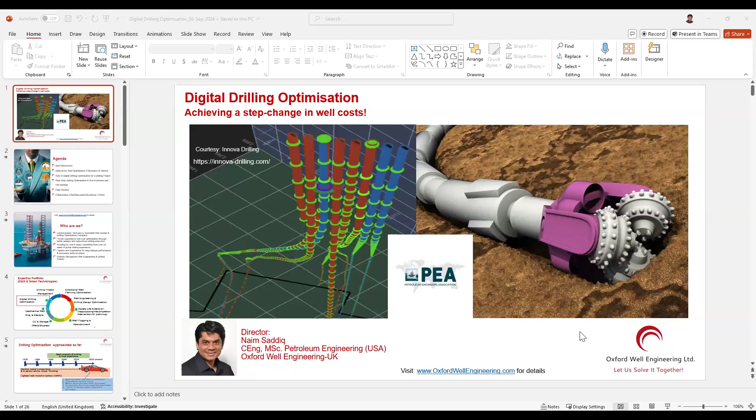So regarding this topic, this is the digital drilling optimization topic. This is one that has been around for about 20 years, actually. But it has taken things into a higher gear because of artificial intelligence and machine learning, but the rules are still the same.

For digital drilling optimization, the main benefit is achieving a step change because the cost of wells is high. When you start drilling, a lot of things can happen because you're starting your journey with the well and you have a certain feel about the cost. Those costs are usually running high, and because of COVID-19, costs have gone up 20 or 30% or even more. Because of the supply chain problem, people have increased their costs, services have gone up. Everything is shooting through the roof at the moment for drilling cost.

On your side, this digital drilling optimization is not very expensive, actually. It's the way that you do things with the data, and data is coming out from everywhere. If you're drilling a well, you have the data. So the only thing that stops you from optimizing your wells to the maximum is learning how to do it, because people can go around and try this and try that. It may work half the time. You need to be very systematic.

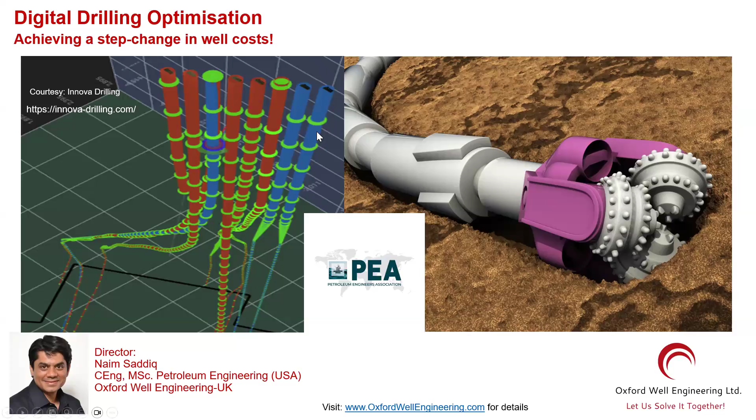But anyway, for that particular webinar, we would like to introduce it with the agenda. So after the brief introduction, which I just finished, introducing myself, I will also introduce something about my company, just maybe a single slide.

So we will talk about how this optimization stuff is going, what's the philosophy and the trends. Philosophy is paramountly important for anyone who is looking to solve a problem. They have to have this philosophy to work with. If you don't have any philosophy, you would not be working and pushing through the difficulties, because if you have certain trends that you're trying to follow and certain workflows, then you will be pushing through obstacles because you know this works. Once you have a feel that your direction is correct, then nobody can stop you.

Nothing can stop you. Yeah, we'll talk about the role of digital drilling optimization, how people use them for a drilling project from well planning, even from pre-well planning. It's a kind of journey that you have to take. If you want a full-on, full circle optimization, you have to respect data all the way, and also how it can be leveraged to apply with engineering packages and things like that. So it's got this power that you can actually use for all the stages of the drilling project.

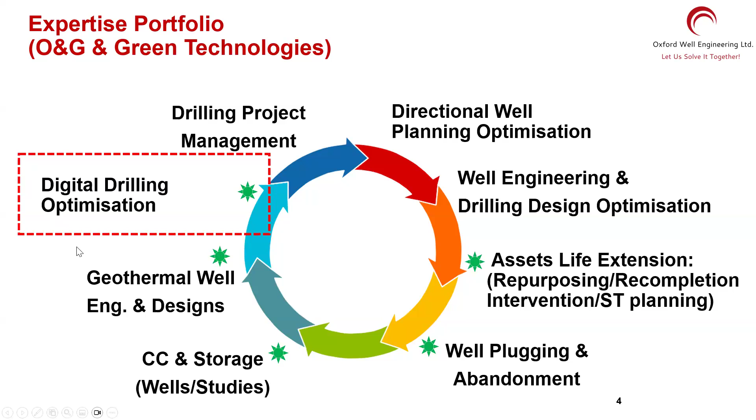So this is the digital drilling optimization. It's called green - why is it called green? Because you are able to save rig time, and when we say rig time, you're talking about reduction of carbon footprint. There is a big number on the rig - if the rig is operating 1 day less, it means this amount of tons of carbon footprint is reduced. So if you do the optimization and finish the drilling job a little bit earlier, you save a whole lot of money as well as carbon footprint. So what you're going to learn today is directly aligned to the green goals that people are looking to reduce this carbon footprint. It's a nice touch to it.

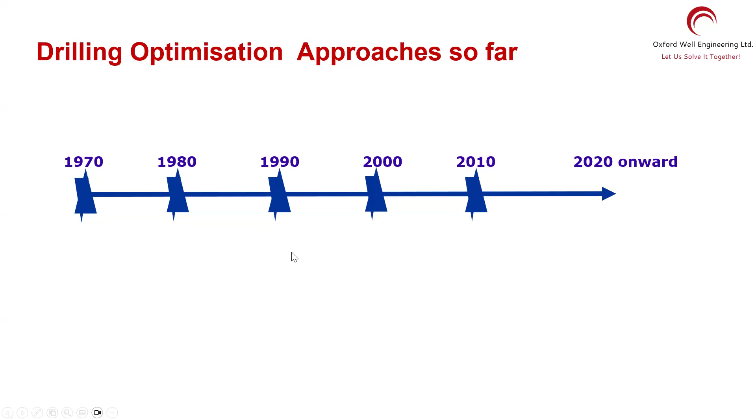Okay, looking back, if you were a highly experienced drilling person, you may recognize it straight away. In the older times, 40 years ago and 30 years ago, most of the senior drilling people had 40-year experience, 35 years experience. So you may see some of those people with this knowledge. In the older times, up to maybe the start of 2010 or so, decision makers' experience - if you have an older drilling engineer or drilling professional, this is all you require to optimize. You will say, okay, this guy has got gray hair.

Let's look for even more gray hair person and find out what he has seen, what he has learned. Some people call them the highest paid person's opinion - HIPPO. This is like a funny joke, basically. Find the HIPPO, he will tell you what to do and how to design.

He will have answers for everything, or he will get someone like himself to give you answers from various areas of expertise. If you are looking for mud design, this is the hippo for it, and this is the directional drillers hippo. So we got hippos all around the place.

When I arrived here, at the start of the year 2000, when I started my career, I had those hippos all around the place, and people would say, don't bring your calculator out, don't start the computer, I already know the answer. On the rigs, in the offices, you'll be surprised, this is specific to drilling especially, very pronounced. I'm calling it a problem because the younger person would not have a voice, would be very difficult to convince anyone or to have an opinion, because somebody already have taken it from you or from someone like me at that time.

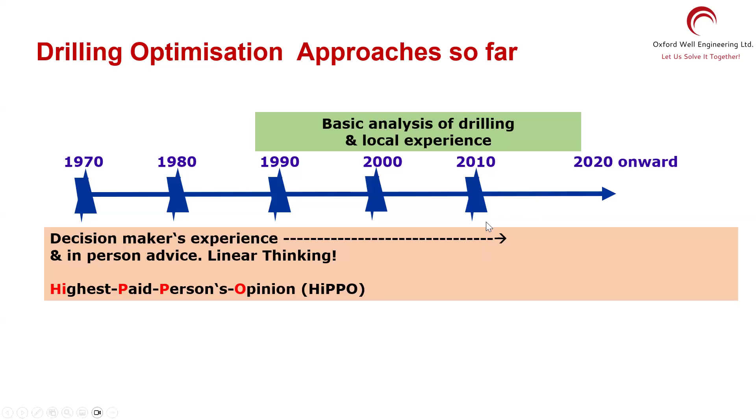So what people have done is actually opting now for complex wells, looking for highly specialized approaches. They want it slick, this is on the to-do list. But if you bring in a highly experienced person who thinks in the old-fashioned style, he would be leaning towards experience a lot. He's saying that he will customize, but actually he is leaning towards the backward side of things, like, okay, experience and what happened in the past will happen again. Linear thinking, that's what we call it.

So what I intend to say is that now things have changed slowly because the rewards of following the traditional things were diminishing. And now people are talking about efficient use of information, comprehensiveness in the technical analyses, and more recently, we're talking about give me everything in automation.

If you go for any proposals or bidding at the moment, go to any country with any well campaign, they are looking for AI, automation, machine learning, prediction of things. How fast will be drilling? Will I have a stuck pipe? They want the machine to tell them, so they don't have to do it, they don't even have to look at the screen. So this is what we are aiming for, even though we are not getting it, like I said.

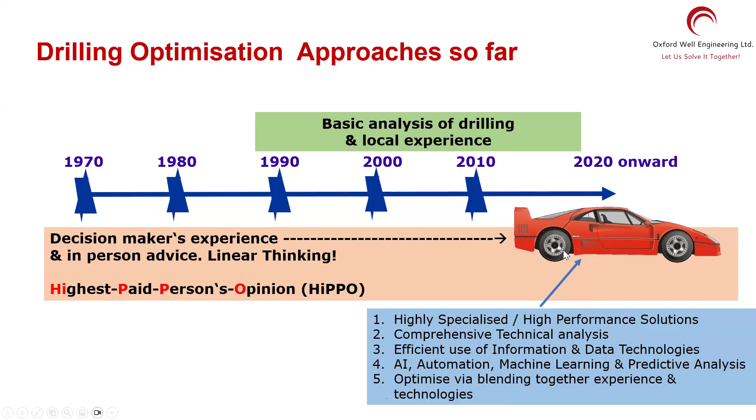So what you must have before you say you're ready for it: working nicely, supportive management to start with. If your bosses or people who can pull the lever and make things happen are not supportive, you cannot do anything. Also, visions. If the management does not have a vision, or they are supportive and have money and want to do it, but don't have a vision...

What they will do with the wrong vision - if they have a wrong vision, they will put you into the wrong direction and you will not achieve it. They are supportive, but they don't have the right vision. Right vision is very, very important. Very few people have it.

For example, if your management decides to do digital drilling optimization, but they hire people from the universities, they need to mix and match - they need to have the right people. So it's very important to have a vision so that people can get the benefit of what they are trying to achieve. You must have the right people.

When I say right people, it does not mean they have to be highly experienced or supreme in their domain. However, you want to have a mix of people - less experienced, middle experienced, and highly experienced - a kind of layered approach. Consider it like a cake: icing, middle layer, and bottom layer.

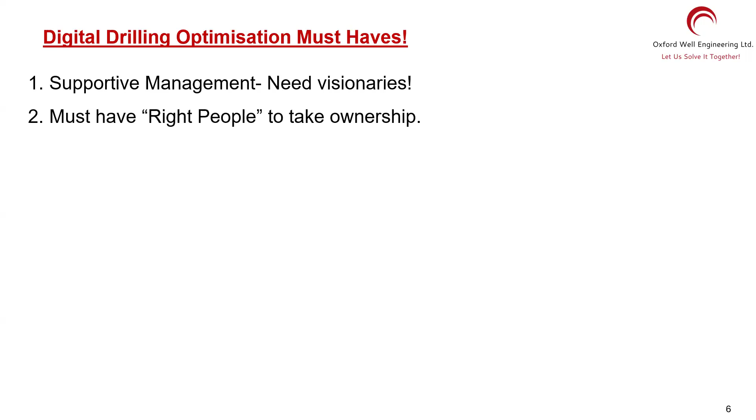A passion that you have for digital does not actually make it happen. You need to have a mix. If you want to do it, you do it yourself or with a third party. If you work in a company, the company should do it themselves, or hire a third party.

If you hire people who are already drilling the wells for you, they cannot be independent or transparent. You need to have vendor neutrality. If you don't have vendor neutrality, it will be very difficult for them to report their own performance. So make sure you get this right.

Believe it or not, one of the biggest companies in the world, when they started to do digital drilling optimization, just told their drilling company: okay, guys, you are drilling the wells for us, can you do the digital drilling optimization for us as well? They said, yes, of course we can. And then they realized that the company did not report the failures. This is what I'm talking about - start it correctly, know what is going on and how to get the most value.

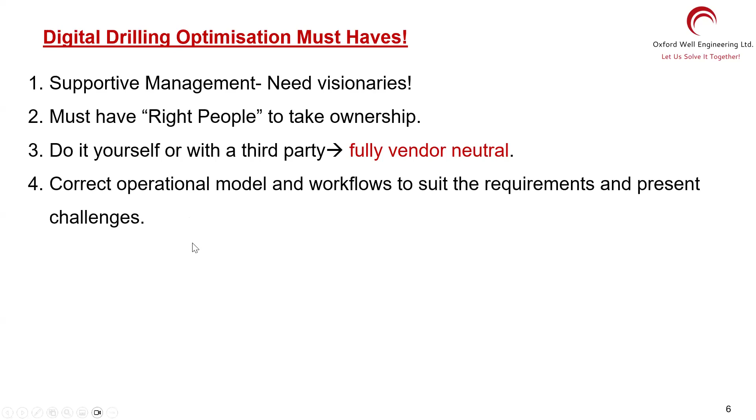So get the model right. You need to have a correct operational model. If you have a wrong operational model, no matter what you do, you will get no benefit. And the workflows, of course, need to suit the requirements.

For example, if you are worried about a stuck pipe - a very big failure in drilling, as most of you probably know - it can be 20% more cost on the well, even 50% more for land wells. You want to gear your model to suit it so you will not miss that issue and you will correct the problem. So you need to customize it.

If you're having anti-collision problems with other wells, and there are many wells in the area, you may want to gear it so you can monitor the center-to-center distance between your well and the offset wells, calculating the safety factors and things. You cannot get everything the software or approach does for you automatically - you need to make it yours so that you solve your own problem.

Unsuitable automation and oversimplification of algorithms is an issue. There's a lot of hype about AI automation - I can automate this, I can machine learn this, I can predict this. But about 50 or 60% of the time it doesn't work like that, because people have complex issues. We need to respect the complexity when building automation algorithms or picking technologies.

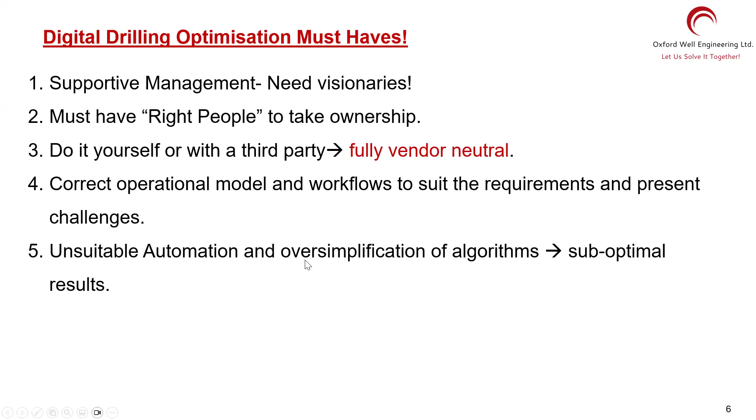Be aware of these because drilling is very complex. It looks very simple and very in order, but when things go wrong, your automation and oversimplification of algorithm is your enemy, because things are too complex for it. It's not built for complexity because it's early days for those things. So be aware of it.

You don't want damage to the cost and damage to your reputation by following these algorithms. Some companies offer automations and don't care if it's giving you the correct reading. They just say this is the situation, it will work correctly, but if anything changes, it may not work properly. People keep using it and don't realize what is in the mix. So be 100% alert on this kind of thing, which is hovering around in the data and analyses.

My suggestion is to automate what you can automate with assurance, which is sort of common sense. Otherwise it will give you a false positive - meaning it's coming out true, the problem is happening, but it's actually false. Or the other way around. That's the situation you want to avoid as an engineer.

Being an engineer, you have to remember the softwares and things are there to serve you. You run them, they do not run you.

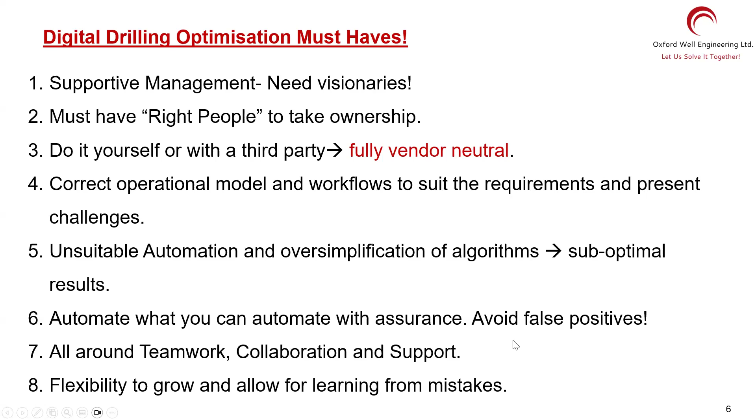This is something I learned myself and I respect it a lot. Let's make all the mistakes and do it quickly so that we don't have any more left, because this is only a limited thing you can mess up with. So these are the points you have to remember - you can think about it more later.

So you learn it by drilling them. For example, you have a problem with running casing. You say, okay, I have to do the wiper trip. I have to pick up a different BHA so I can remove the cuttings. You apply it on the next well, and the next well is slightly better. It did not have the problem you had previously. So you have a nice step profile that plateaus out.

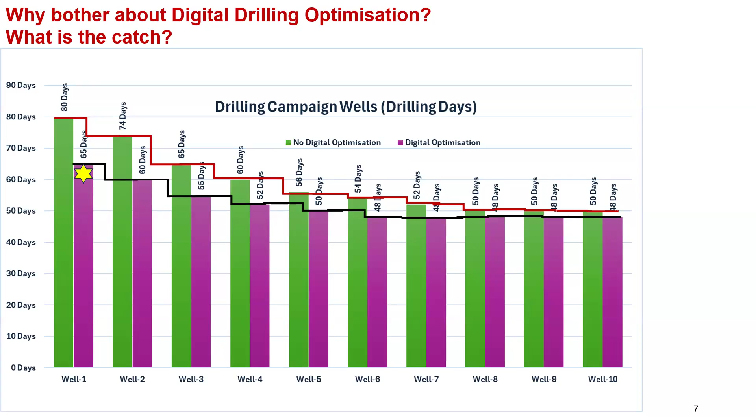With the black step profile, you start with a shorter length of well. The first well finishes in 65 days, for example. And then you learn so quickly, very quickly, whatever you need to learn. And you reach the plateau sooner because you learn everything through the crystal glass, very very clear. Data tells you, you calibrated everything, you know what's going on. And this is the smart way of doing it.

When I say days, think about an offshore environment. For example, if you compare it for this particular example, it's about 70 days out of 600 or 590 days. That's 12% of the rig days saved for the whole campaign, looking at the whole campaign. So this could be the kind of power, and I am telling you that this is a small example. I have seen very big changes.

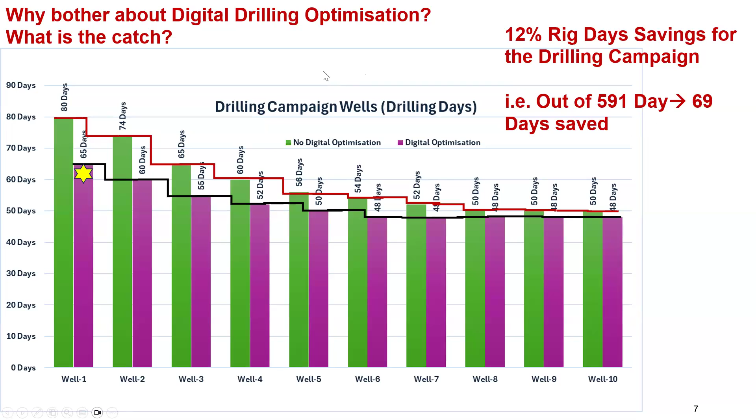So this is the example. If you have mature, experienced people, and then you bring in the whole digital portfolio into it, you save a huge amount of days, a huge amount of carbon footprint as well, and money. When you talk about money, people start to listen more, basically. So let's have a look at what's happening with the money. It's about $17 million out of 147 for the whole drilling campaign, 12% of the rig days saved.

When you multiply the numbers, suppose you have a land rig, a high-end nice land rig, $100,000 per day. I just came up with an easier number. So these kinds of savings are hard to imagine unless you are in the middle of the action.

If you talk to the people who delivered the first green well, second green well, they will be celebrating. They will say, oh, everything worked, we did a great job, look at this, record setting and all that stuff. But they have not even tried the full optimization. When I say digital optimization, I do not mean just the drilling part of it. I'm talking about well planning and going through all the stages of the drilling project, all the way to actually constructing the well, drilling the well. Everything is digitalized and optimized in a way that people have been using in different big companies.

So guys, just wanted to say that this is just an example, and I have seen worse or better, depending upon how mature the team is.

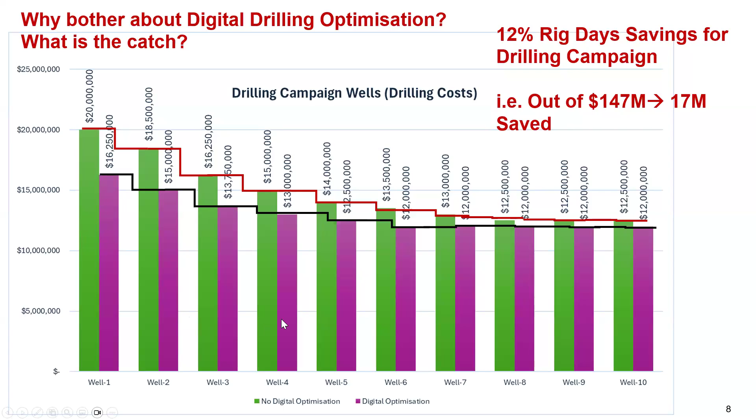So just to highlight the value of these things, if you look at the cost of the rig, every day on the rig - hypothetically, a deep water rig - $1.5 million a day. I have been on wells where every day was 1.5, sometimes 2.0, $2 million a day, deep water. How come this becomes so expensive?

Because on the rig, you have so many big services, and all of them are charging money the same day. Look at this list: the very first one is the rent of the rig. Then you have all the people working on the rig, transportation back and forth, the boats coming in, muds and things. Every day they have fancy stuff going - why fancy? Because this is what it costs. I was told it's costing even more these days. The one I was involved with during COVID time, we were the cheapest one.

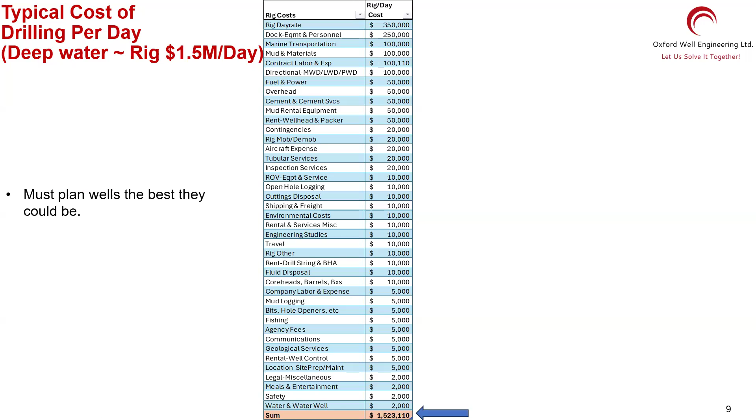So for the deep water rig, how about if we say, why don't we make the well shorter so they finish early? So we don't have to keep paying 1.5 million every day. If I can save one day, 1.5 million there - why don't we plan the well so it can be finished quicker? That's your motivation for this.

Also, make sure you deliver them. When it comes to drilling, you have planned the well to the best of your capability - that is half the battle. You have not finished it yet, you just dream about it. You have put together all the bits and bobs, and now it's time to deliver it. This is where huge problems happen.

If you did not do a good job with digital drilling optimization, also the well engineering suffers. Well engineering is infused with digital always. If you want to make it stronger, use real-time well engineering, calibrated well engineering. Don't just simulate something that you can't be sure is close to reality.

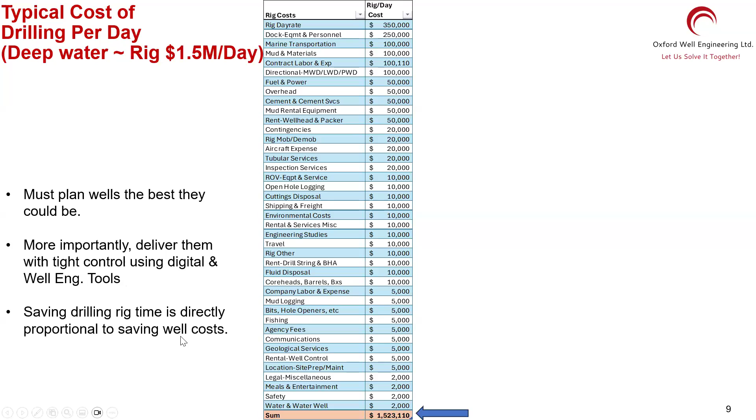You need to apply your engineering judgment to get the numbers right. Saving rig time is directly proportional to saving well cost. That's everybody's common sense. In this particular case, suppose you are on that deep water rig, and they want to swap out the mud system or change the mud weight to some other mud. They ask you how fast they can do it, saying it will take about 10 hours to circulate new mud.

So you can multiply that across a huge number of times. Even if you save just 12 hours for whatever reason, making things quicker every time you do the displacement or something similar, 12 hours is $750,000. And what about if you finish the job 4 fewer days? That's $6 million back into your pocket. So this kind of thing works for offshore wells.

All the offshore wells are quite expensive. Jackup rigs are cheaper, their daily rate could be $750,000, half of that number. On land, you could be at $100,000 or even $75,000 per day. But think about it, it's still a big chunk of the cost that you will shave off if you are smart and plan your well the best they can be.

Okay, so let me bring in the presenter view. What well cost could be optimized? When you say well cost, what are the building blocks of the well cost? Let me give you some example.

10% is rig up, rig down. You don't touch them, you don't tell them to go faster in the rig ups and rig downs, somebody can get hurt. Same with the tangible equipment, fixed cost, casings and things. You may not want to touch them or optimize them because they already decided, they already bought it.

However, operational drilling cost is day-to-day drilling cost. You need to focus on how to make it quicker. Everything that is safe is still very safe and highly efficient because this is where you work to deliver.

So for that, my suggestion would be to use a thorough approach. When you are planning the well, digitally optimize them. And when you're drilling the well, digitally optimize them. Henceforth, you will be building the well design to suit the requirement using high-end digital, because high-end digital tools are very cheap now, they are available.

If you don't get the best possible tool, you will still get some tool that works as good, with some tweaks of course, so they're not so bad. Only thing you need is to be stubborn. You need to say, I don't accept it, I want to do it, and build the design to suit the requirement.

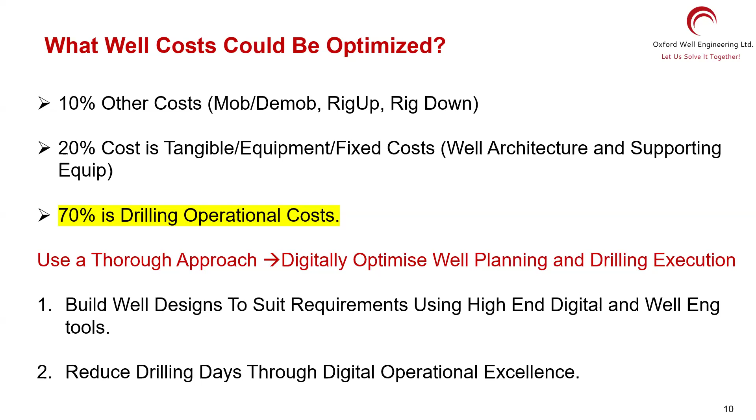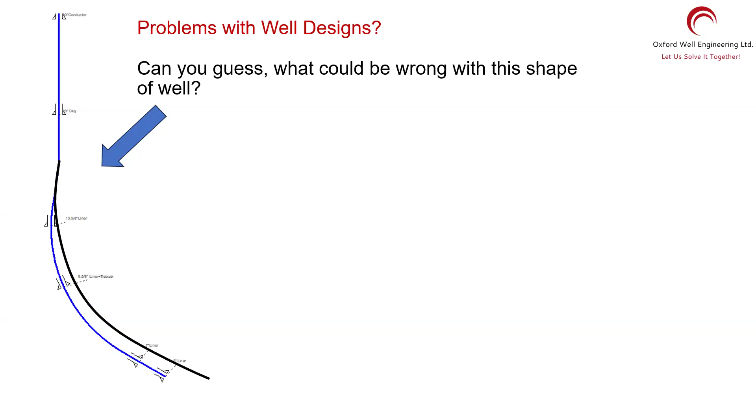Ask for more information. Say, can I be flexible with the target? 99% of geologists say yes, because targets are not real targets, they are formation tops or whatever. You can move them alongside, no problem.

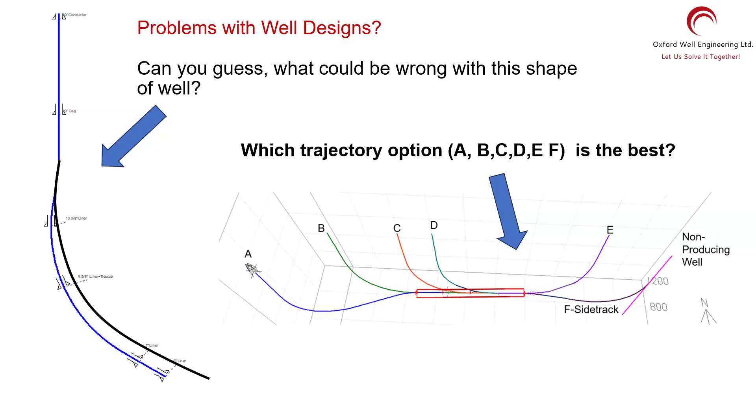You need to let the data run the show for you. So actually, one of these will be good, but this one, which was picked up by someone, should not be the case, because of the data analysis that you can actually do.

So let me go through some examples. There was an operator who had a big twist-off. The whole BHA dropped in the hole when they were drilling. They fished for a long time. It cost them $8 million. They were not happy with it.

So when they brought in the data guy, it was too late, they had already suffered through it. The data guy told them there was unusually high torque. He plotted the torque, off-bottom torque, and could confirm there were huge contact forces. Because of that, the torque was extremely high and the kickoff point was not correct. The big contact forces were coming from the incorrect kickoff point.

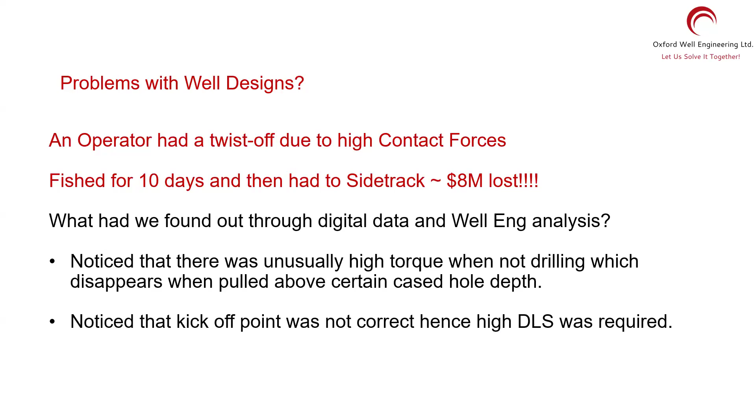They chose that kickoff point because they thought it was good. They did not check the casing wear and high contact points. Because of the high contact, the BHA actually fell off into the hole, because it can only take so much punishment. So there's a problem with a well design like this.

The approach should be for yourself to actually do the proper analysis, go through everything with the offset well analysis. Don't be the old-fashioned one who will just read through the end-of-well report. Actually recreate the problems in the digital domain and solve them retrospectively. Know everything about the troubles and the failures, and then feed this back into the well planning and drilling execution.

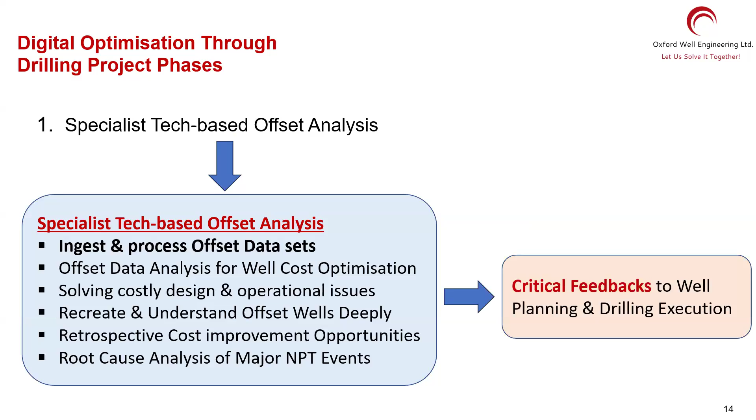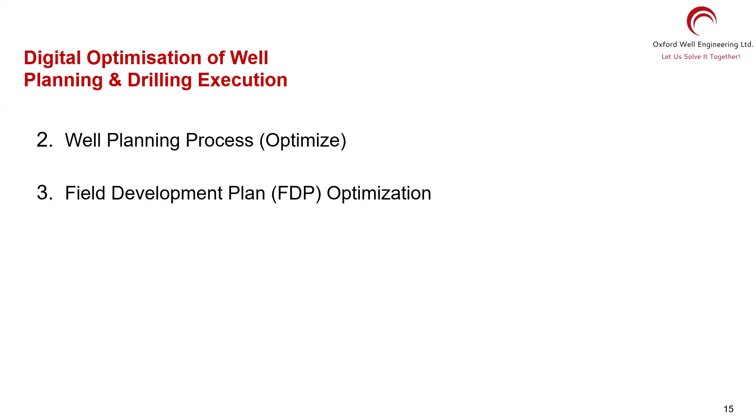So it will also be supported. The data will go into all kinds of other activities that you will be involved with, like well planning process, field development planning. You will be calibrating your wells across the field, and you will also be choosing the right design, using the data as your tool, and calibration of your well engineering

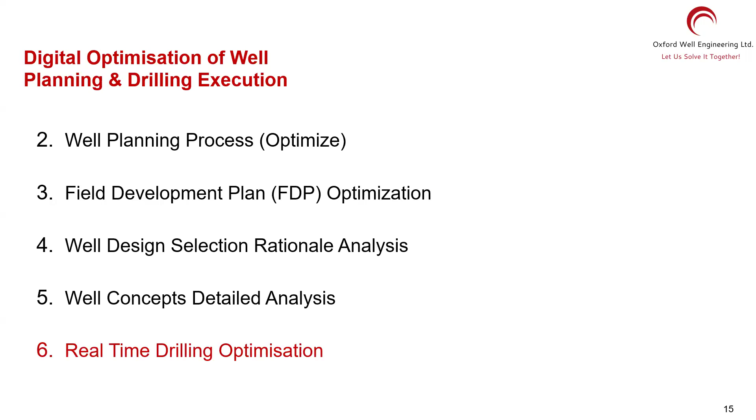model with the data. At the end of the journey, you will be doing a real-time drilling optimization, which I have explained a bit more about. So those things are required basically.

So this is just kind of showing you why this is important, this real-time drilling, which I have verbally explained to you, that this is like a magnifying glass. You want to catch the issue and correct the issue before it becomes a problem.

It multiplies the benefits of experience in the field. It combines them actually, so you can have a full circle of well cost optimization if you do this correctly. And also you can do things remotely with this. This is a kind of power.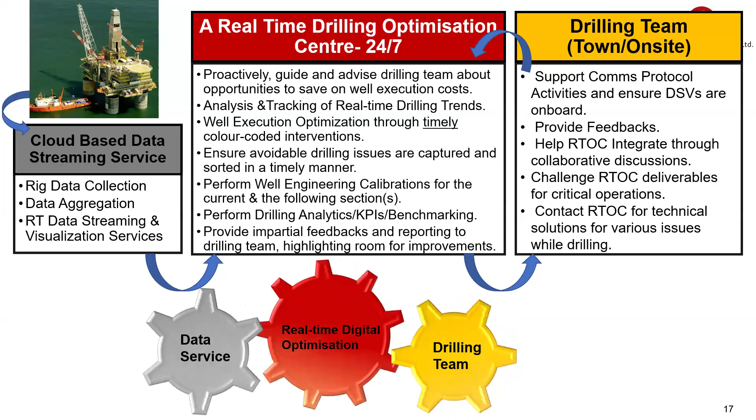Say, this was a good intervention, or ignore this intervention next time - we are on top of it. So it's like a very nice dynamic link of problem solving using the digital drilling optimization. So I could probably take you to a high cost well.

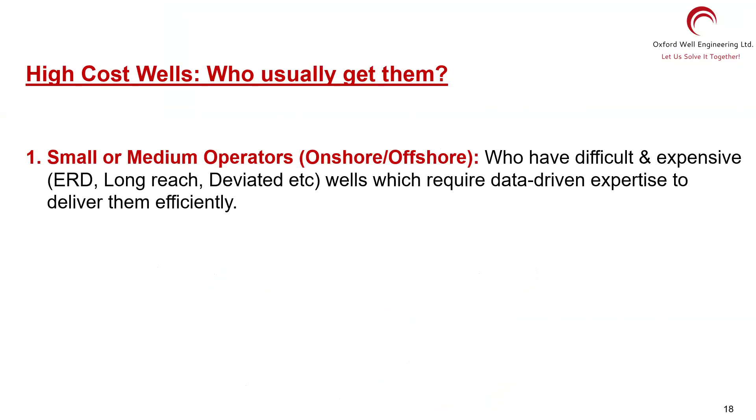Usually, of course, if you don't have any real analysis opportunity, you will lose out big time. And usually the small or medium operator or the very highly experienced people who do not believe in data, they have to pay the price. Their wells become more expensive.

Same with the geothermal operators. A lot of geothermal operators, they want to do things very, very cheaply at a very low cost. Sometimes it bites back. Their wells - I know some geothermal operator, they are drilling the well for the last 1.5 years, 18 months of drilling, because they keep having these problems.

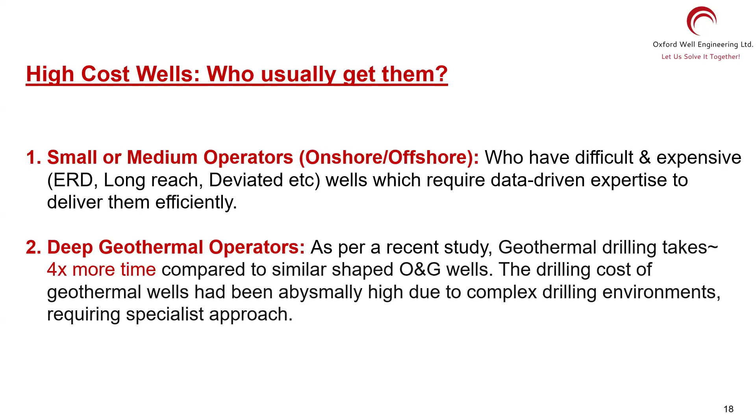They did not know until they get stuck. They have twist offs, they have all kinds of problems. They did not bother about it. So some of them could actually suffer through these high cost wells, coming from those smaller operators or people who did not actually start with this digital optimization.

So success for yourself when you are drilling, it could be answering a lot of questions. I'm not going to read through all of them, but it could be the showstopper. If you don't answer them correctly, it could be a showstopper. It could be a huge cost, all of it actually. I have written some of them.

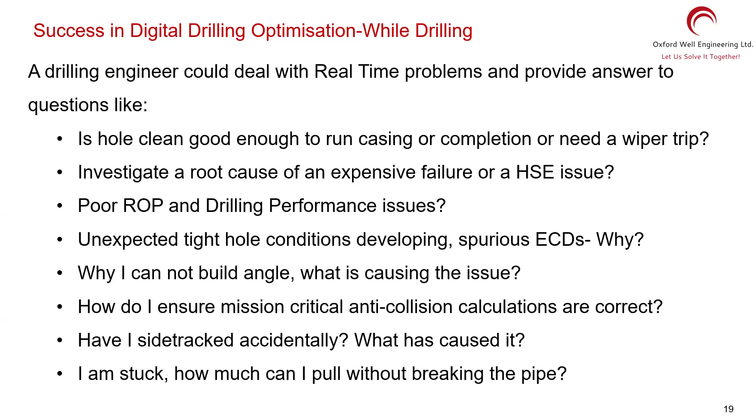If the hole is not clean and you run the completion, it will get stuck. Stuff like that is quite big, actually. So you can actually look through them a bit later if you like.

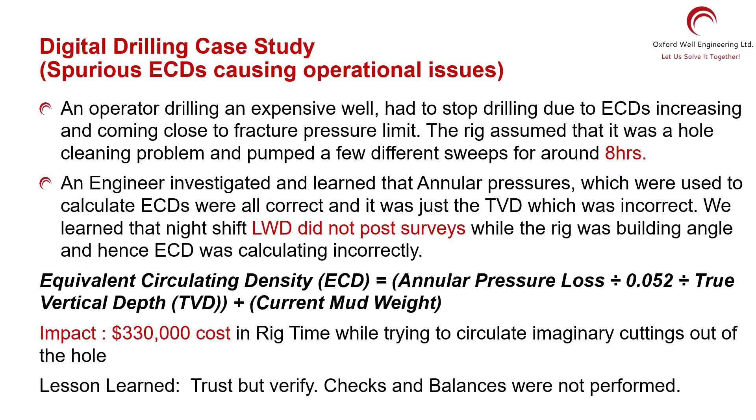And this is kind of a case study for various issues. I'm not going to go through them because you can read them later on, since there's a lot of text in there. And same with the running completion.

Some people could not run the completion. They tried it twice, but they did not run data analysis and engineering solution. When they did run the engineering solution, they solved the problem.

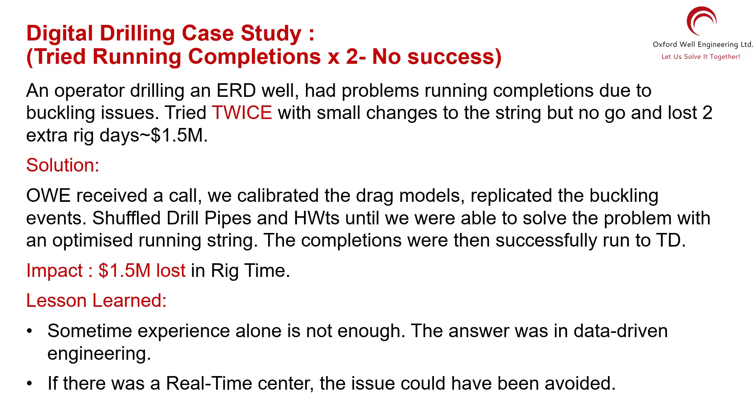This exactly happened with my own company. And I did the design for them, but before I could do the design, I used the data. So it is sometimes the case that experience is not enough - you need to use the data.

So post-well correction, you can have all kinds of solutions that people have come up with. Sometimes you find out by using the data analysis that you can find out if the technology is required or not required. After doing it the first time, you can collect enough data to analyze and find out if the technology you used is actually good enough. Is it working for you?

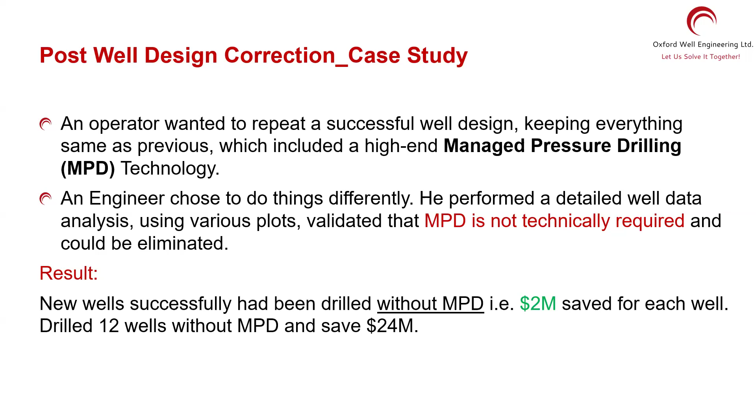In that case, it was MPD. It was one of my actually interesting interventions myself - it was quite a good moment. And the manager came to me and said, you paid for your salary for 5 years, Naeem.

So you could save a huge lot of money just by being good with the data. And this is the kind of some more example that I will probably say. The final words - I have already spoken a lot about the benefits of it.

And I think I can probably summarize it with taking some questions. I am a little bit close to the time, so I will probably let you guys ask me.